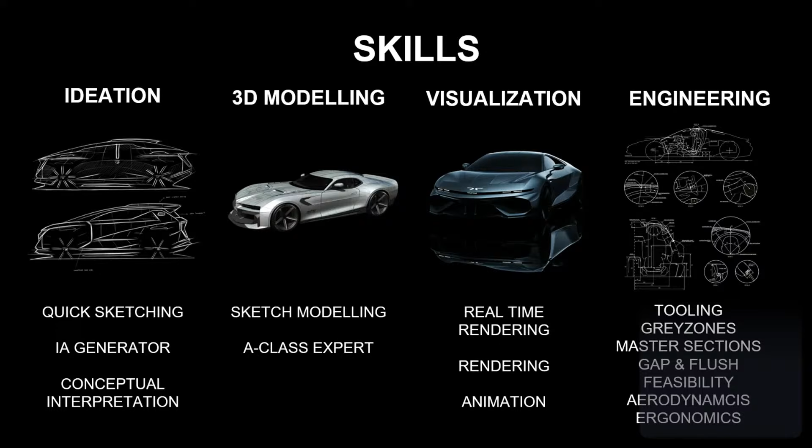Beyond high-performance cars, my portfolio also includes interior design, motorcycles, and yacht design projects. I try to provide an end-to-end design service, managing all phases from ideation and 3D modeling until visualization and engineering. So, for example, while my strongest skill is 3D modeling, from early concepts to Class A surfaces, my engineering background allows me to deeply understand technical constraints. This ensures that I can cover all the other stages of the process, creating designs that are not only visually striking, but also technically feasible.

After this quick introduction, let's go straight to the heart of today's CATIA talk. For me, the biggest challenge over the years has been the constant contest of switching between design creation, visualization, presentation, and technical development. This means continually jumping between different software and formats that, for me, fragments the creative process. So that brings me to the central question: how do you manage a complex multi-software design workflow without breaking the magic of design? That for me is the most important thing.

My answer is the 3DEXPERIENCE platform, because it directly solves this problem by letting you navigate between all necessary tools. This continuity for me is crucial because it protects the design flow instead of breaking it. So to understand this a bit better, let me explain a bit of my design workflow with the GP1 project, which at the end is the same for any project. The GP1 was born and developed on the 3DEXPERIENCE platform since day one.

So first, I design and sculpt in ICEM Surf, and this is where the shapes of the GP1 are born. Then I make the leap to CATIA Live Rendering. I can drag and drop my 3D ICEM Surf model and start seeing it with real materials under photorealistic lighting. This is already incredible for me for validation. Maybe the next step is to bring the model into product perception experience.

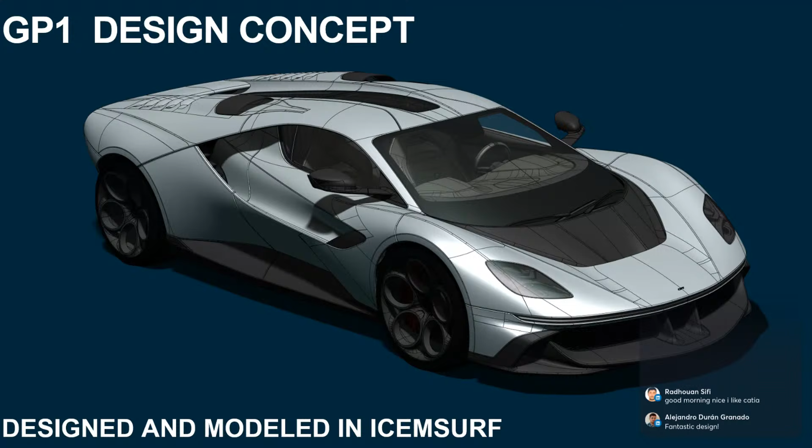I thought it was just for A-class, and it's true that it's more common to use for A-class, but there are some other tools that are maybe more famous. I've been using ICEM Surf since day one in concept modeling my whole career, and for me it worked really good. Let me show you also why I think it's not just that, because I have a proper explanation to tell you why I think it's the best for that too.

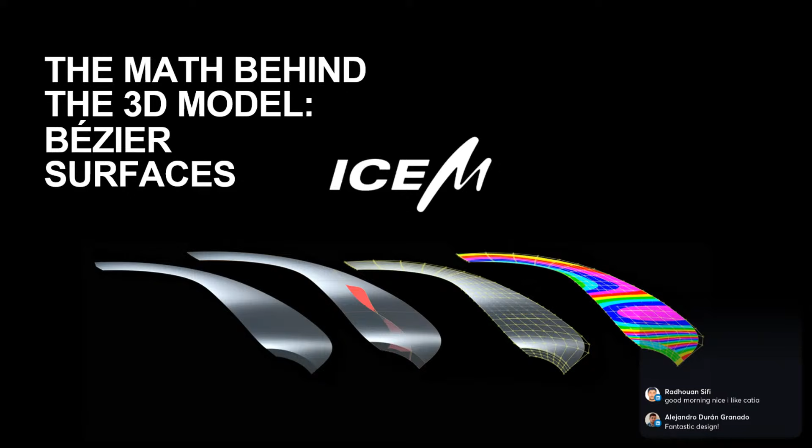So for example, for me the most important aspect of ICEM Surf is its use of the technology of Bezier surfaces for 3D modeling. I won't go into technical details today since we don't have the time, but in my experience this specific family of surfaces provides the highest quality and control for modeling.

In my experience, maybe I can resume this in four key advantages. For example, direct point to shape editing, like you can control all the points of the surface because we don't work with spans. So there isn't hidden information controlling something inside the surface, and you can control everything in this case.

And that gives you really high precise hand-tuned perfection. So according to my opinion, I think they are smoother than B-splines, because you don't have a span, so you can control the curvature much better than with a span inside.

I'm talking about really high precision terms, for example G3 continuity. And also not using spans is good to avoid future editing mistakes when you export the data to engineers.

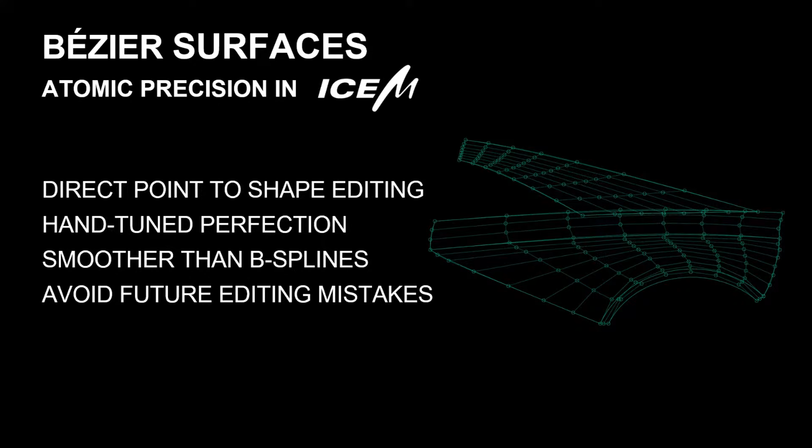And so this is why ICEM Surf and Bezier surfaces are the perfect embodiment of my digital design philosophy that I created, which I call HyperSurf. Its core principle is a famous quote from Albert Einstein: everything should be made as simple as possible, but not simpler. And maybe the best analogy to understand this philosophy is Picasso's bull lithographs.

Look how he captured the perfect essence of a bull with minimal expression in just a few strokes. So the bull from Pablo Picasso is of course famous, but it's such a simple shape. How can you apply this principle to something as complicated as a high-performance sports car?

This is a good question, Nick, because for me the ultimate goal is to model with the efficiency and mastery of a Picasso painting, and it's about achieving maximum expression with minimal means. For that, I try to define some HyperSurf DNA that you can recognize, or must be able to recognize, in each of these models that I work with this philosophy.

For example, you can recognize complex surfaces but distilled to their simplest geometric essence. Also, instead of using so many theoretical surfaces, I use the concept of modern surfaces, which are a bit more complex but give you more definition, meaning you can define a bigger area of the car with less information.

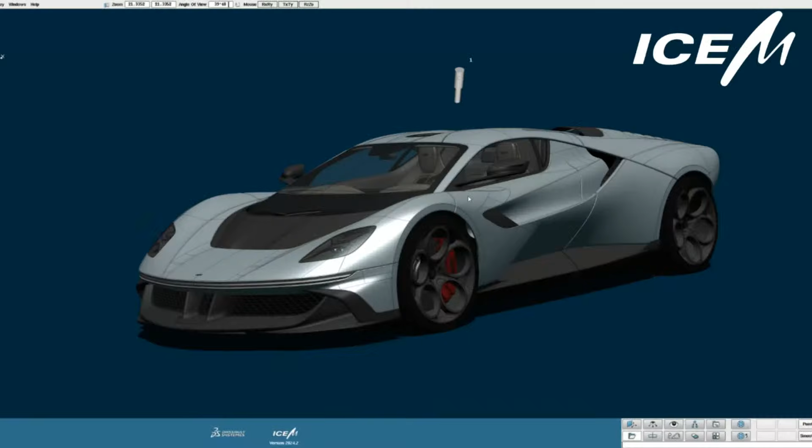So here is the GP1 digital model, where you can see the Bezier patch structure of its components. This is what I told you before, the patch layout. And maybe I will use the clipping plane tool in ICEM to reveal interior details and critical cross-sections. This cross section we call the master section.

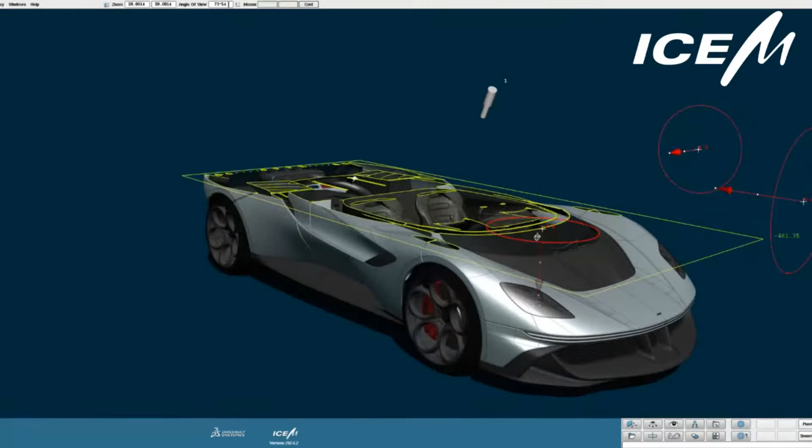And this data serves a dual purpose: to validate the design with my customer, and also for launching a preliminary engineering analysis for ergonomics, aerodynamics, and manufacturing feasibility. So with this status we are ready to know and calculate many things about the project for the feasibility.

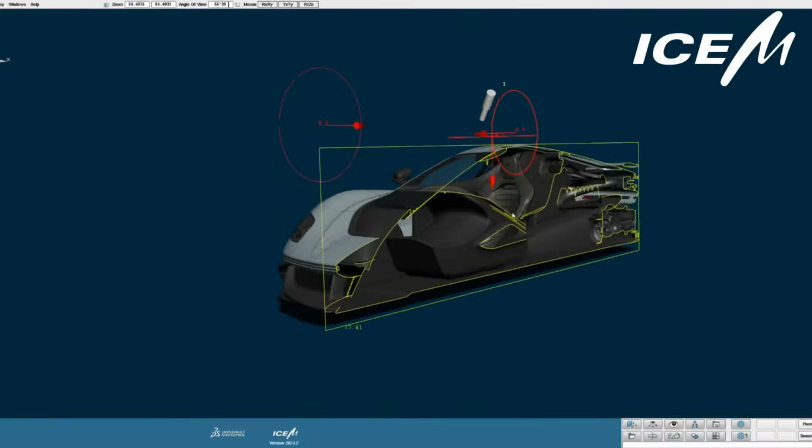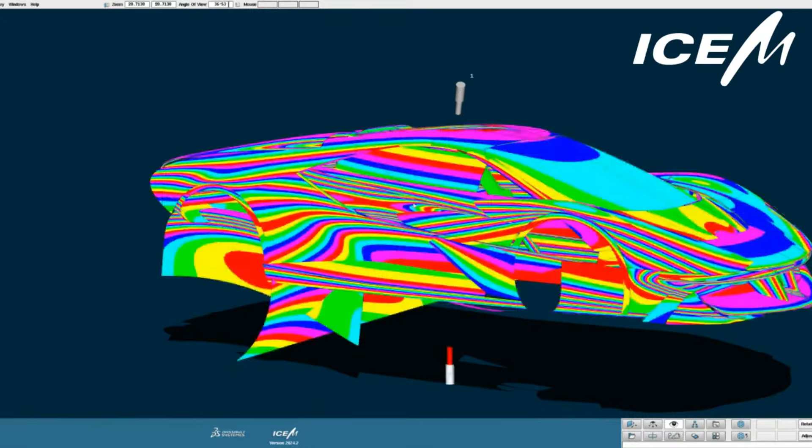Now let's examine the concept of these model surfaces that I told you about. So to illustrate the hypersurf philosophy in the digital model, I defined, for example, you can see here that I try to define the entire body side, the cabin, the wheel arches, all using a few foundational surfaces. I try to design each of these surfaces the same way I sketch with a pencil, and I try always to reduce the number of them, because this way I can control the whole model easier and faster.

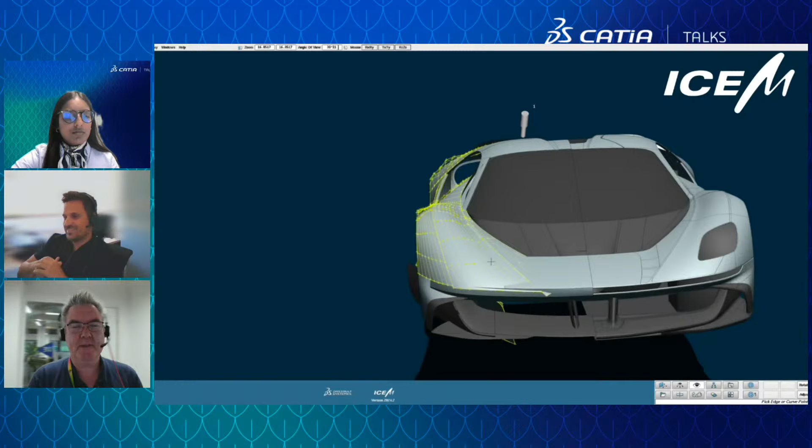So, Angel, sorry, this looks a little bit messy, if I'm honest. So are these concept surfaces, or are they going to be in the final Class A model? Good question, Nick, because this is the philosophy I use for concept modeling, to be able to be really fast editing the surfaces.

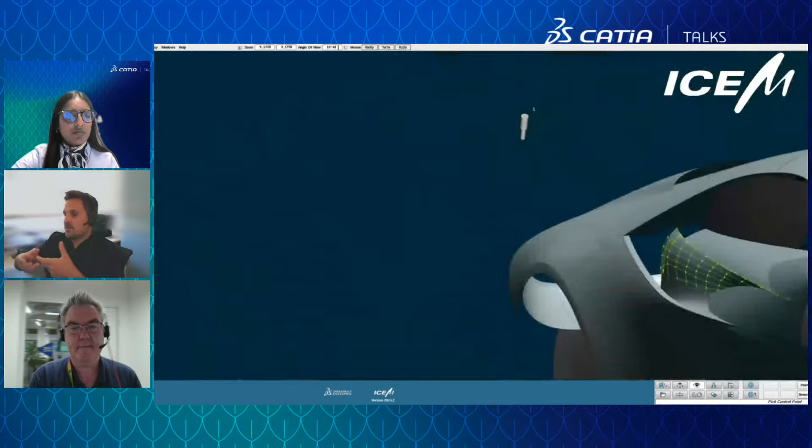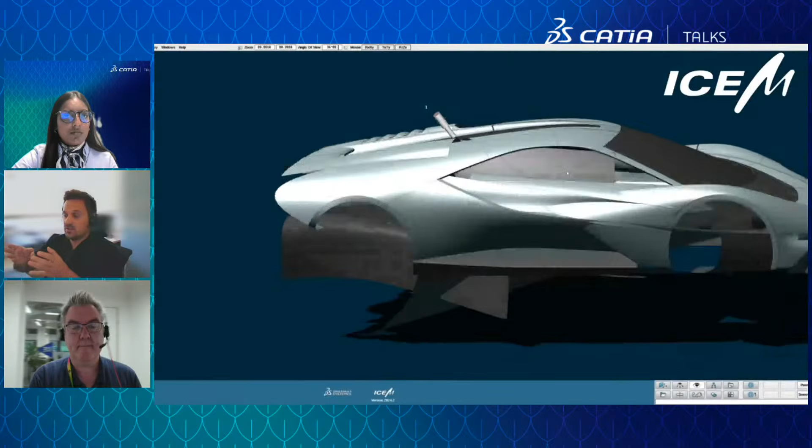For example, if I need to change sections, highlights, and also play with the model, I use this concept. Then when I need to add more definition, from these model surfaces I extract other ones to give this definition. And of course I try to clean up and set everything to the standard or classic surfaces. But this is, for me, the philosophy I use for concept modeling, and this is why, using this philosophy and ICEM Surf, I'm able to be a really fast modeler doing this.

But as you know, once we have the model surfaces or theoretical surfaces, to create a proper automotive design model, the next step after defining all this is to add many layers of detail, because the goal is to finish the car at a highly realistic level. We need to incorporate all the components you'd find on a real vehicle. This is crucial for two reasons: visualization, but also evaluation, because this part needs to represent the final production design. So, for example, you see here many parts like the diffuser, the mirror, the lights.

These parts are not the final form. We will need to do more iteration to add more refinement to finish them. So this is just like a kind of placeholder parts.

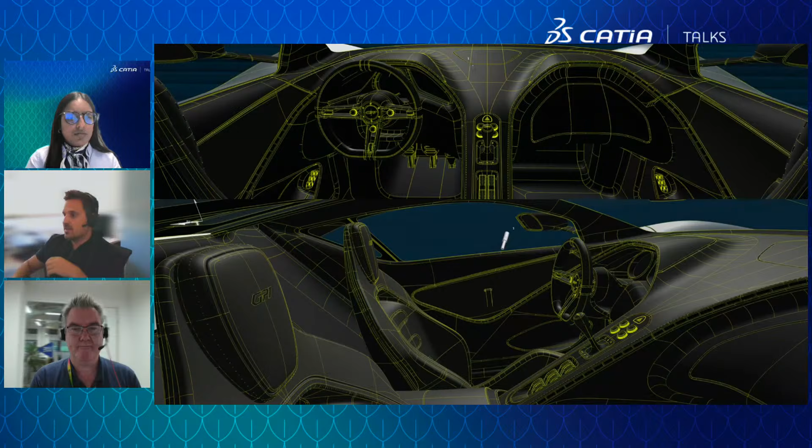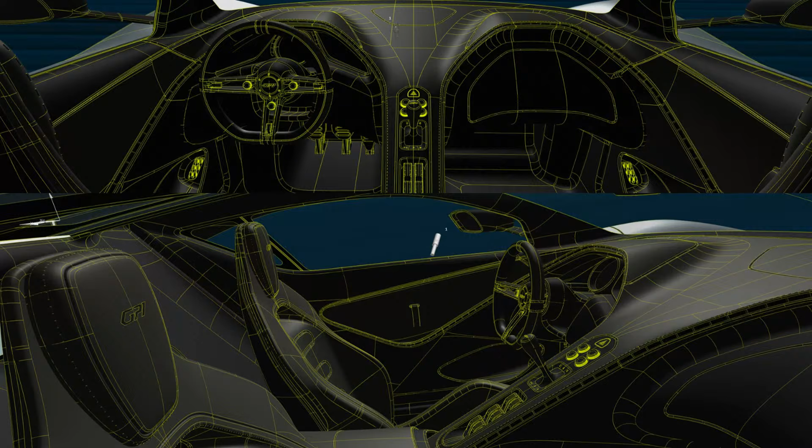But we have the exterior and also the interior. The interior presents, for me, an even greater challenge, because we have numerous components and intricate interfaces between them. For example, this is an unfinished concept of the interior. This is just to show the main thing of the interior to my client. But even like that, the level of detail needed and coordination between parties is really high.

And of course, once you have the exterior and interior, you need to finish the car, adding a lot of detail, like shut lines to take care of each corner, or to finish properly the headlamp, the tail lamp, or the rims.

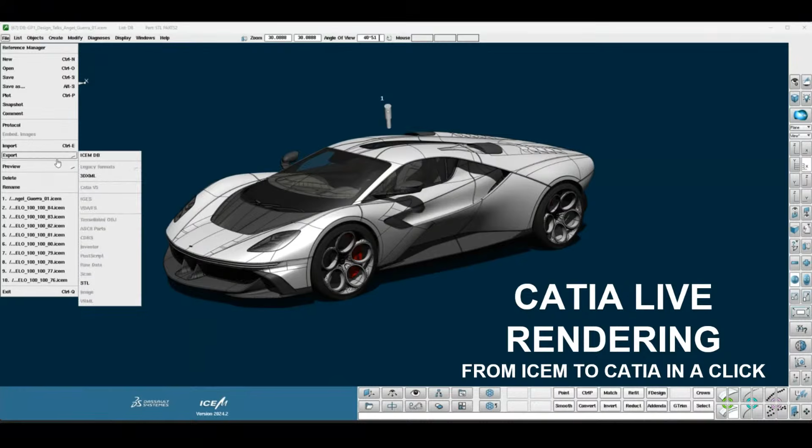Because at the end, the more complete the design, the best experience you will have in live rendering. So let's move to chapter 2, visualizing in CATIA Live Rendering. As I told you, to jump from ICEM Surf into CATIA Live Rendering is very easy.

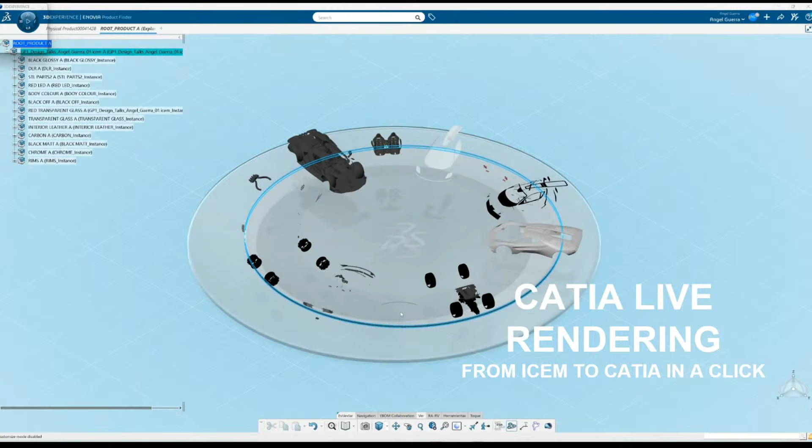We are here in Live Rendering, and both are part of the 3DEXPERIENCE platform. You just need to save the file as you saw in ICEM Surf, then open Live Rendering, and open the file again. It will keep the same names by part that you had in ICEM Surf, and you'll keep the same shaders, so you just need to start playing in live rendering with the model.

And to do that is very easy. For example, here you can see the model with the basic ICEM Surf shaders. So what I will do now is grab my material from my VCC palette and start applying them. And this is where it gets really fun for me.

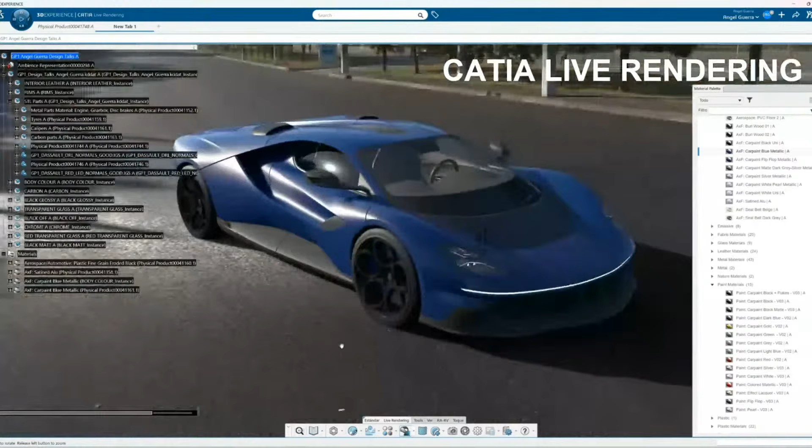I can try out any car paint. I can think of maybe the bright red, the light blue, or that dark tone. So I can play around with different plastic or metals from the VCC material, just to check that the design actually works in any case, no matter what material we throw at it.

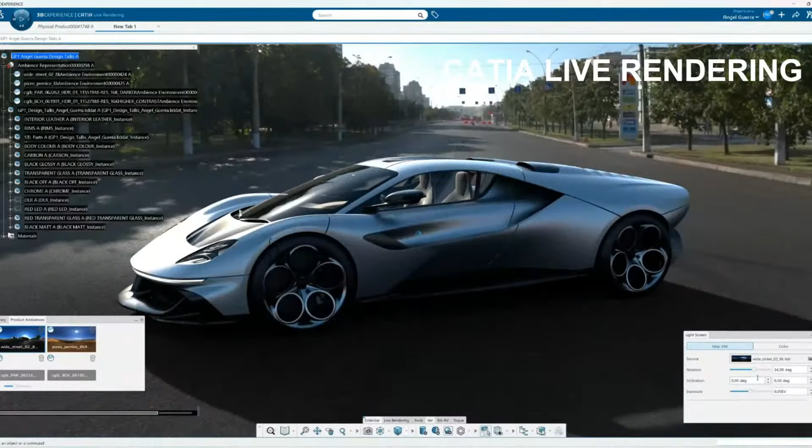So for my own process, I'm a big fan of live rendering. And then, for example, when I'm preparing a proper presentation for a client, I use PPX, as Nick will show you later. But live rendering for me is like a personal playground. It's where I put my ICEM Surf model to test and see if it holds up in any situation, or with any material or lighting.

What's really key here is to see how the shapes play with reflections and shadow. Sometimes it's surprising how different the model could look in the modeling software, ICEM Surf, compared to live rendering. That's exactly why I try to push it in live rendering and set up really dramatic lights and shadow, just to double check that everything is perfect.

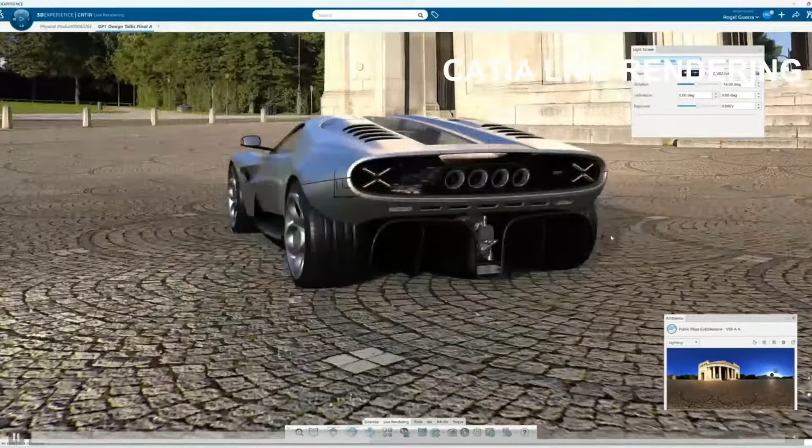But wait, because it gets even better. If you think the normal live rendering is cool, just watch when I switch on stellar mode. This basically gives us a much more powerful ray tracing performance, making everything look super realistic.

This lets us do things like drop the car into a dark scene and check how the front and rear lights will look when they turn on. And also it's really nice to see these sleek neon reflections on the car.

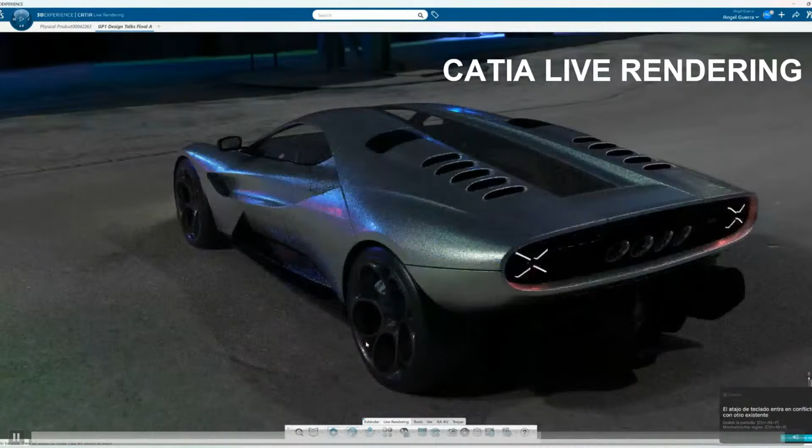So to finish, after testing everything in live rendering, I'm confident that my design is rock solid. And once I got that peace of mind, I know the model is ready to prepare for the next step, the client presentation in PPX.

And for that, already in live rendering, you can start preparing some visuals to support this presentation, because it's super fast to pull a quick rendering. You just need to hit the render button and let it run in the background while you keep working on other things in the same platform or with another tool.

So you can see here some examples. Now in chapter 3, Nick will show you the product perception experience with a really nice presentation.

Thank you. Thanks, Angel. Yes, so here we are in CATIA Product Perception Experience. This was put together by my colleague Stanislas Dacremont. Thanks, Stan. What you can do with this is bring in your model either from ICEM Surf or from anywhere really, or pull it in from the 3DEXPERIENCE database you share with your organization.

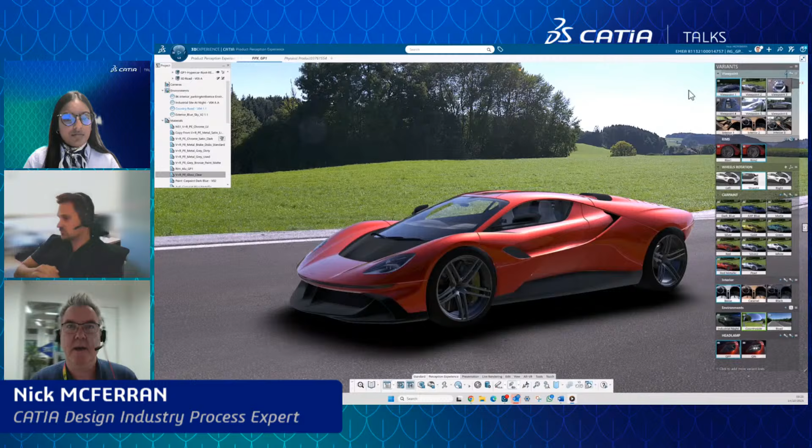We can make a template of a presentation for your design review where we preload all your library of materials if you wish, and your different ambiences, different studio environments, and you can build up a template that you can reuse over and over again.

You can store different viewpoints. Just by clicking on the little thumbnails with the mouse, you can flip between them. But you can also make a proper immersive experience by applying triggers to a model to switch between the two. So if I go into presentation mode, you'll see how it's animated. It animates the model through the different viewpoints smoothly, so you can control that animation.

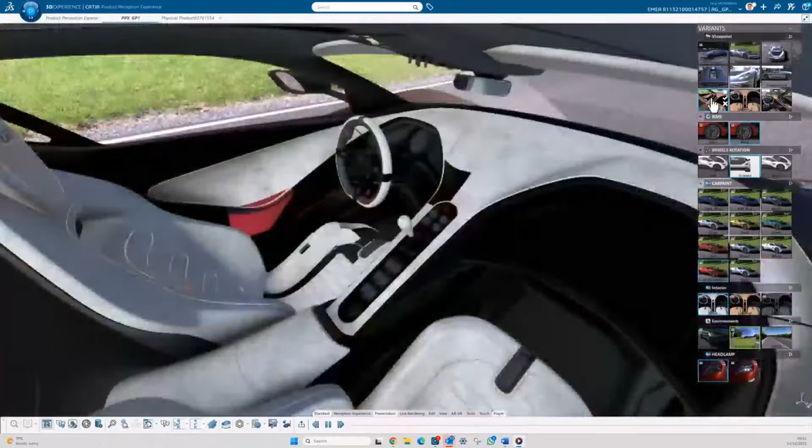We're using the very latest DLSS, the deep learning super sampling, which sort of simulates ray tracing and uses AI to predict the way it's going to go to speed up the process. So here we are looking at some different viewpoints on the interior. The interior is always more complex than the exterior, I would know.

Here we're just clicking between the different variants on the thumbnails. So let's come back outside of the car for a second. Let's take a look at some of the other things we can do here, going through the different rim designs, the circular style or the slim design.

Now I'm going to change to my favorite ambience. This is the industrial ambience, which really brings the model to life. You can see the reflections of the lights over the surfaces of this beautiful car. I think it looks fantastic in these colors, in this environment, with the real-time reflections giving that extra realism.

I'm able to turn the wheels, and I've made a trigger on the car paint of the car. It's very easy to do - I'm usually hopeless at this sort of thing, but it's straightforward to add triggers to your model. I've made the headlights into triggers, so picking the lens switches the headlights off and on. It's really simple, and I think it just looks absolutely gorgeous, Angel. It's a beautiful design, and the way the light moves across it from every angle, it looks absolutely perfect.

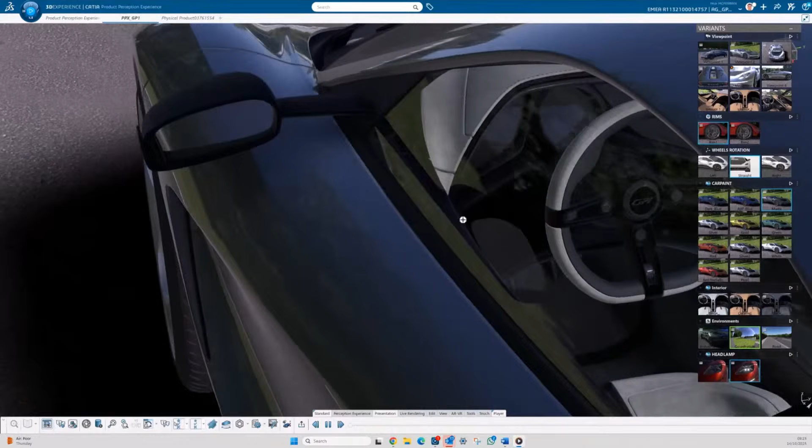Coming back out to the outside of the car, let's take a little look at what we can do. So you see the DLSS is actually doing proper ray tracing - you can see the reflection of the mirror in the side glass there. So it's actually working.

I want to reach in there and adjust the mirrors just a little bit, but take a look at some of the details here in this beautiful rim design. Check out the reflections and shadows going on, and that effect of the disc brake. So a really realistic visual experience, all brought to you through CATIA Product Perception Experience.

So I congratulate you, Angel, on a fantastic project. Back to you. Thank you, Nick.

So maybe now we can move to chapter 4, Immersion, VR. I have to say this is my favorite chapter, because for me this is the most remarkable innovation in recent times. If seeing a model in rendering already felt like something from another planet, then being able to jump inside the scenes with a single click in CATIA is absolutely mind-blowing.

Believe me, what you see and feel when reviewing a model in VR is a world away from a flat screen. With proper CAD materials, ray tracing, and shadow, the experience is so immersive that you feel like you are standing right in front of the car.

But VR isn't just for impressing yourself or your clients, though they absolutely love it - it's the final piece of what I call...

Yes? Angel, sorry to interrupt you - which headset are you using there? I use Meta Quest 3. I think it's a very good VR set, and the resolution it gives you is really, really high, and for me it's more than enough to check my design.

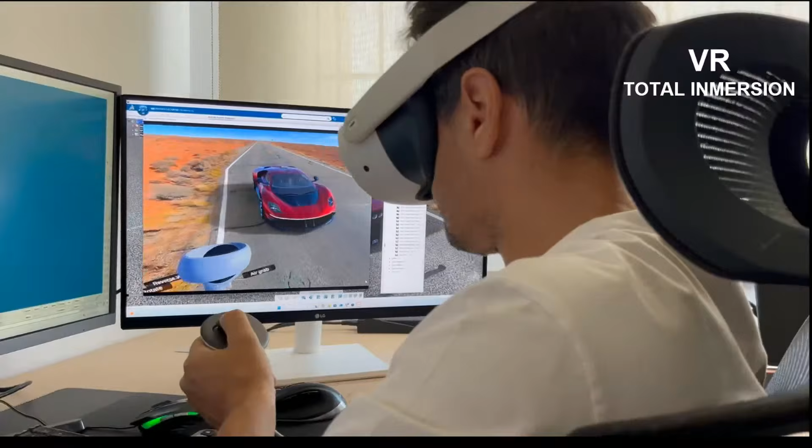So coming back, I call it, for example, the design trinity - to understand this, I call it surfacing, live rendering, and VR. Because only after reviewing the model in these three different ways are you 100% confident that your model truly works. Let me give you an example.

On the GP1, we have a graphic line that starts at the base of the pillar and runs along the roof, defines the shed line on the rear hood, and finishes on the rear wheel. This solution is new - I knew it.

It worked from a design point of view because I created it in ICEM Surf and later verified it in live rendering. But since I had never seen this solution in a real car, I wasn't 100% sure it would work in reality. However, after seeing it in VR, I could finally confirm that not only does it work, it works exceptionally well, adding a distinctive touch that makes the design, in my opinion, truly unique.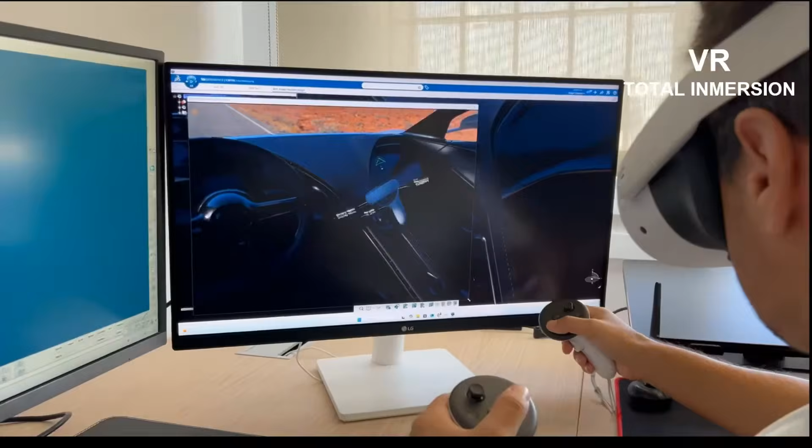And also, if you think reviewing the car exteriors in VR is impressive, my customers are even more amazed when I have them sit inside the vehicle. This immersion becomes even more intense when you review the interior, and they try to touch and examine every detail in the interior.

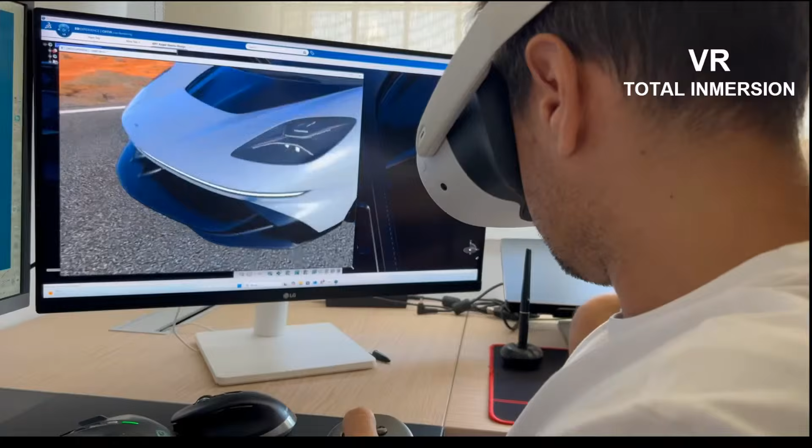I think thanks to the CAD material tools, which are very realistic, the ray tracing, and the shadow, you feel like you are sitting in a real car interior. So maybe this is the most remarkable thing I'd say about VR in CATIA - you can apply everything like in live rendering. You just need to jump inside and you'll keep the same visualization quality.

And the most amazing part of this, coming back to the beginning of the presentation, is that you can achieve all this using a single platform and domestic equipment. I work from a home office, so I have my own workstation. This has been my design process for the GP1, created for my client Garagisti, using the 3DEXPERIENCE platform. The workflow involved different tools like ICEM Surf, CATIA Live Rendering, and product perception experience, and of course you're able to switch into VR at any time.

So I hope you enjoyed this presentation. I look forward to seeing you at the next CATIA Talk, and I'm sure that we will have more surprises in store. Thank you from my side.